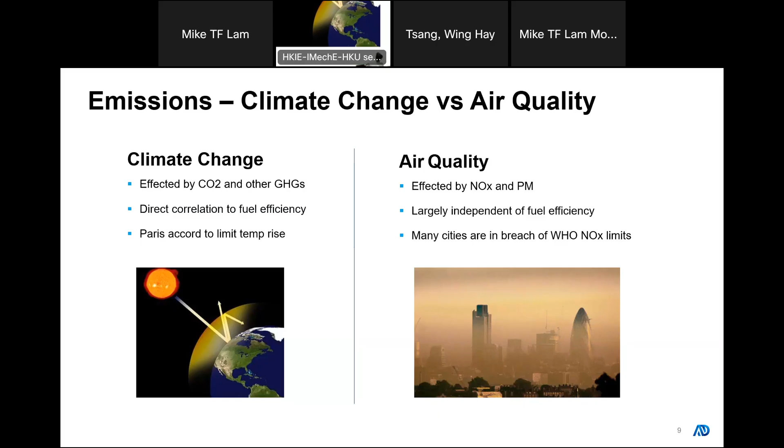So let's just define what a low emission vehicle is. And again, it really depends on how you're looking to improve the vehicle and what aspects you're trying to address. There are a number of different approaches that are used in different places around the world. So let's take London as an example. That has been technology specific. London, about 10, 15 years ago, started mandating hybrid vehicles, or in more recent times, electric vehicles. And they've been doing this for some time. So that's one method that a local authority can influence the vehicles by mandating a technology.

However, probably a more practical route is making it performance specific. So in the UK, the Low Carbon Vehicle Partnership, that's now ZEMO, established performance definitions and testing protocols for low emission buses. So if we would take a bus in the UK, we would take it up to Millbrook, it would go on a standardized test cycle, and we would calculate the amount of CO2 per kilometer. And for that bus to qualify as a low emission bus, it would have to meet a certain formula based on the number of passengers it carries, and then compared with an equivalent, say, Euro 3 vehicle in the original case of the system, or in the case of later vehicles against Euro 5. So that's another method.

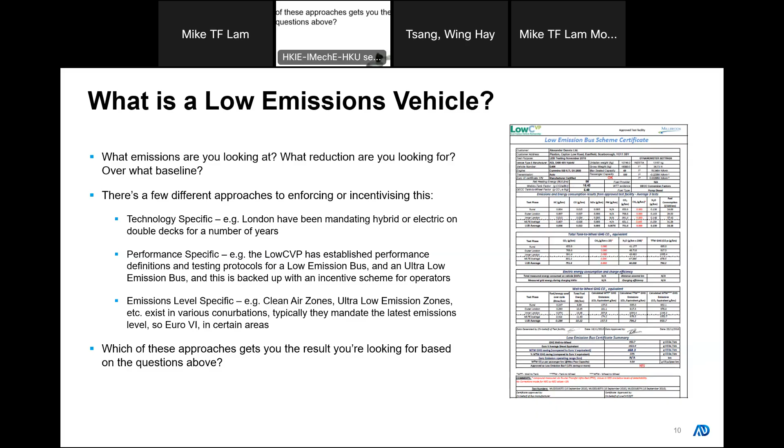And then finally, what we're seeing now, especially in London, you're getting clean air zones. We've got the ultra low emission zone coming in London. And in that case, they're mandating a particular emission standard for vehicles. So in the case of the ultra low emission zones in London and around the UK, that's Euro 6 in certain areas. And depending on what problem you're trying to solve will depend on which of these approaches gets you the very best results.

Let's have a look at the evolution of diesel, because diesel has been around obviously a very long time, and there's been incremental changes as the Euro emissions have evolved since they came in in 1992 with Euro 1. I think this graph on the left there is a really great example of how much better in terms of emission performance the diesel buses of today, Euro 6s for example, are. So if we take 36 Euro 6 buses today, they would generate about the same amount of particulate matter as one pre-Euro bus that they replace. And I think that's a massive testimony to all the engine manufacturers in terms of delivering better emission standards.

I remember as a young boy going to the bus depots in London. When the buses started up in the morning at the run out, you'd have 50, 100 Gardner engine vehicles, and you couldn't see from one end of the depot to the other. And now, there's just no sign of a whiff of smoke, even on startup. I remember, you'd be black.

Just because you've been in the bus depot. And so it is transformational. And in terms of NOx, the same number represents 20.

So let's have a look in Hong Kong. If you look in Hong Kong, where a bus that's being bought today is probably replacing a Euro 3 or a Euro 4. A Euro 3 vehicle, among 12 of those Euro 6 buses will generate the same amount of NOx as just one of the buses it's replacing. And in the case of particulate matter, that's 10. Now, I think that's a point that is missed by the authorities here in terms of the improvement of the general fleet.

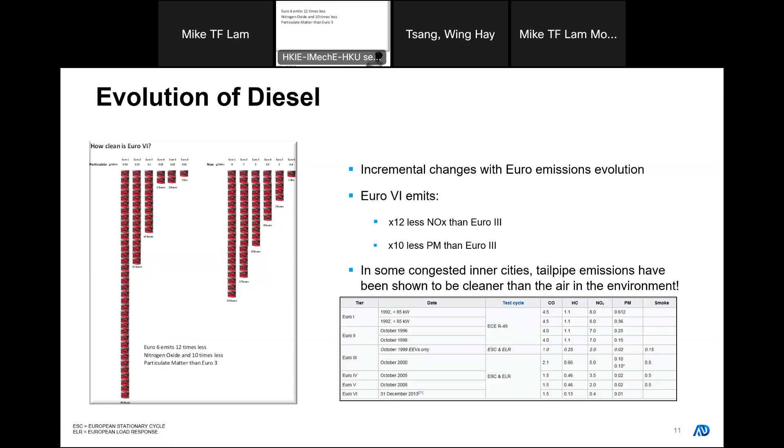So let's have a look at Euro 7. Euro 7 was announced in November last year. The Euro 7 regulations are intended to replace and simplify all the previous emission standards. So whereas at Euro 6 you've got different emission levels for cars and heavy-duty vehicles, at Euro 7 it's intended to harmonise that. And it broadens the range of driving conditions, because in the Euro 6 regulations, the short trips, for example, aren't covered, and they will be at Euro 7.

Also, increased ambient temperature will be taken into account at Euro 7. There's tightened limits for pollutants. I think it's 35% reduction in NOx and 39% in particulate matter. So it's another step change from Euro 6. Also, in terms of tightening the emission for pollutants,

What's happened there? Any advice?

I'll keep going. So, as well as looking at emissions from the vehicles, it's also going to be regulating emissions from tires and brakes. Microplastics coming from the tires is considered a significant pollutant. Thank you very much. And also particulate matter coming from brake systems will now be considered as part of the legislation at Euro 7. Nitrous oxide is added to the pollutant list. And now there's a longer period of compliance required as well.

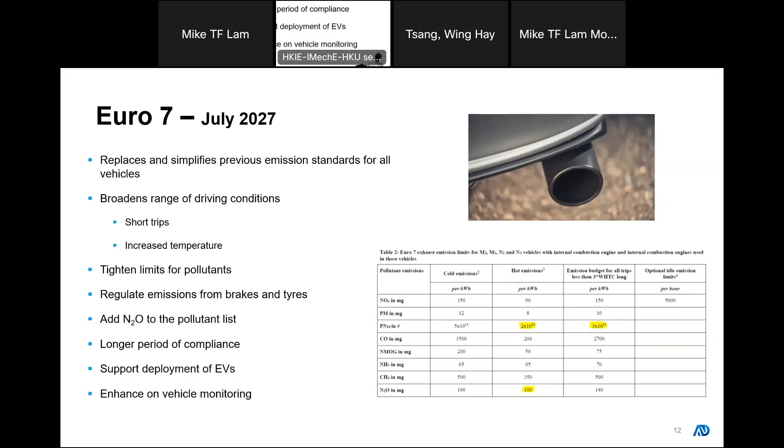So let's have a quick look at emissions and pollutants. But I like this picture. This picture was taken in Scotland, showing one of our Enviro 500s there, and a representation of the number of passengers if they all traveled by car, and the number of passengers that you could get on one bus. And I think this speaks 1,000 words in how bus, just by taking so many vehicles off the streets, is in the first place a good news story in terms of congestion and emission. So we do need to promote as much as possible modal shift out of cars and into public transport.

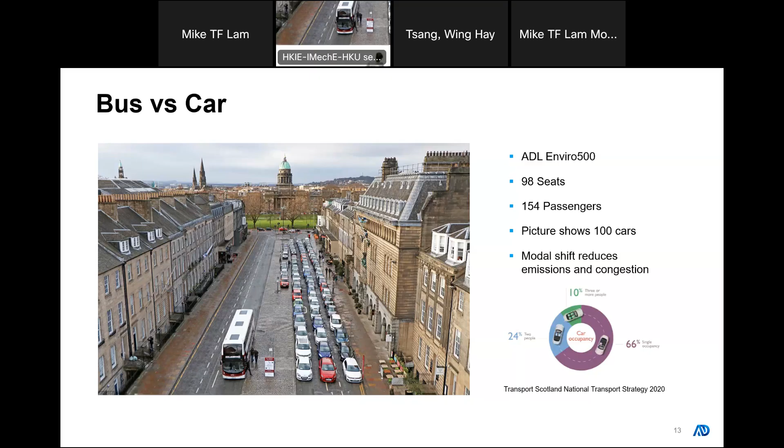Just before we move on to other technologies and in-build, I think it's worth mentioning what we could do with vehicles that are already in service today. So we're currently undertaking a retrofit trial with the EPD here to retrofit an enhanced SCRT system onto Euro 5 buses. The SCRT is a selective catalytic reduction system fitted with a diesel particulate filter as well, a trap. And in that way, we can take about 80% more NOx out of the system, and also over 80% more particulate matter as well.

So it's early days. We fitted the first vehicles at the end of last year, but we've now got all 12 trial vehicles across 3 different vehicle types, across two different bus operators. And just those 12 vehicles have saved over 1,305 kilograms of NOx already. And I think that's quite an interesting stat when you look that we have built nearly 3,000 of these Euro 5 Enviro 500s since 2012. So there's scope there to improve the emission performance of vehicles that are already in service. That's got some exciting possibilities going forward.

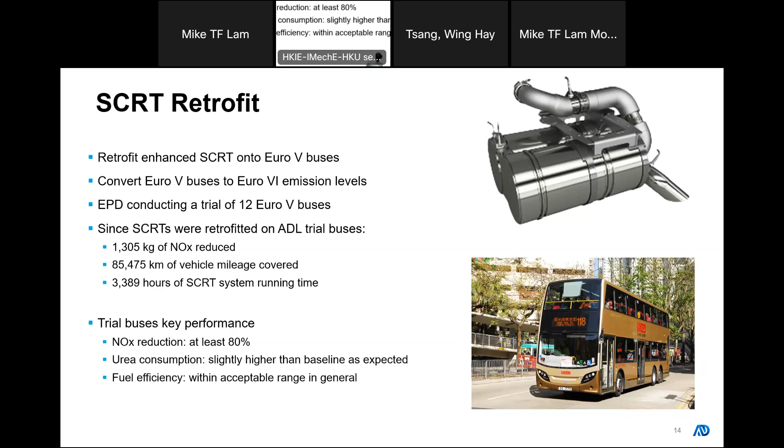It's okay. Right. So that's a little bit of background, and now let's look at new vehicles, what we can do with new vehicles, how we can design and develop new vehicles on that journey towards zero emissions. It's been a long journey. We've been at it for a very long time now, and there's a number of different stops on the way there. So we'll start with base diesel vehicles.

We'll talk about efficient diesel vehicles. We'll look at some hybrid vehicles with mild hybrid systems, full hybrid systems, range extended hybrid systems, and then we'll talk about hydrogen vehicles and then the full electric products. So let's start with the efficient diesel. I've already said that diesels in buses is not a bad solution as it is.

However, what we did discover in the UK is when the Low Carbon Vehicle Partnership put up a challenge to deliver low carbon emitting buses into the UK, we discovered you could do that by hybridization, but also using some clever tricks with the existing diesel vehicle, and we could get down to a bus that complied with the low carbon emitting bus standards.

And that's important because in the UK, low carbon emitting buses at the time were being subsidized by the government to the tune of about 6 pence per kilometre. I think if you do about 80,000 kilometres a year, that equates to about 4,800, 4,600 pounds. So that's a really significant saving, especially if you consider that is going to be for the life of the vehicle. So you've almost paid for half of the vehicle over the course of its life just from this subsidy alone. So there was a big impetus to make the vehicles compliant to this.

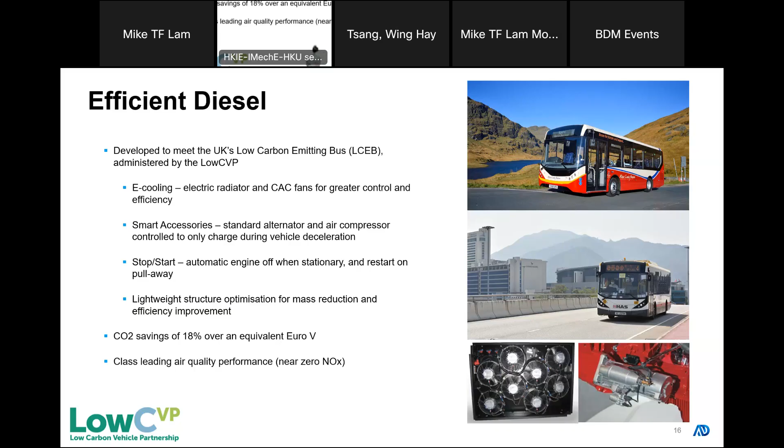And also, in common with all of Alexander Dennis projects, we've made them as light and optimized the structure as best as possible to reduce the mass. In the old days, we used to say about a mile per gallon per ton. If you take a ton out of the bus, you'd save about a mile per gallon. It's not quite as much as that, but it's a good sales point. So we saved about 18% of CO2 over an equivalent Euro 5 by implementing these options.

The reason they used petrol electric was because the drivers were really struggling to cope with driving a bus which has got a clutch pedal, it's got a brake pedal, it's got a throttle pedal, you've got this lever that changes gears, you've got a horrible crash gearbox. They're a nightmare to drive. I've driven them for many years, and they are really quite taxing to drive.

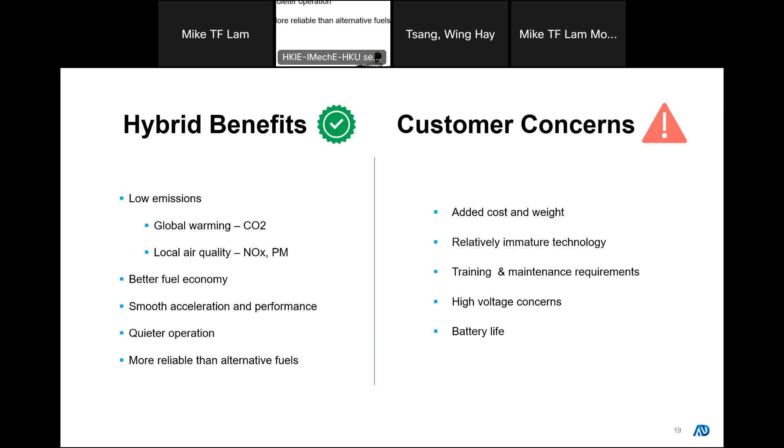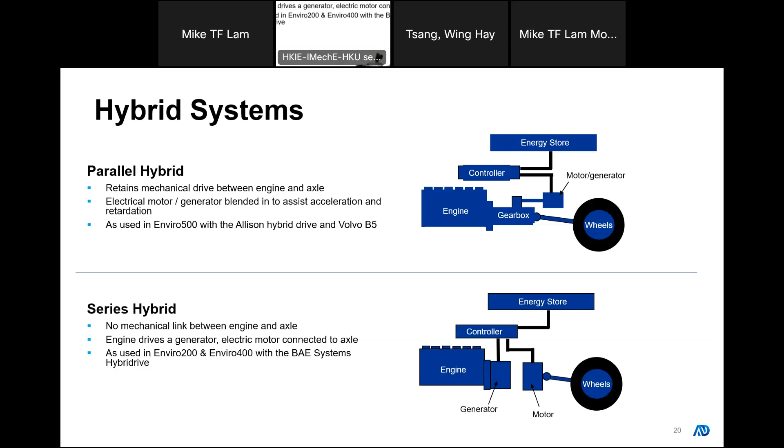As you can see there, there is no physical link between the engine and road wheels. That motor is mounted directly through the differential to the road wheels. So in that respect, I really consider that to be an electric vehicle, but at this stage it's got its own onboard generator, which it needs to be able to operate effectively. So we use the series hybrid system on the Enviro 200 and Enviro 400 in the UK with the BAE Systems hybrid drive. And as I say, we've built about 1,700 of those now in the UK.

So let's have a look at some of the key elements. We'll talk about the prime mover in the next slide, but in terms of the electrical machines, on the back of the engine we've got an integrated starter generator. This is a generator, a permanent magnet machine, that also can be used to start the engine. So in terms of a stop-start variant, we can use that generator to start the engine. And it's amazing when it does. It just clicks in. It's not like a normal start. It just goes. It instantly starts when it's being started from the starter generator.

So we've got that, and then attached to the rear axle is a large permanent magnet electric motor, and they have proved to be remarkably efficient over the life of the vehicles. And then the key part is, of course, the battery, the energy storage system. Now, that energy storage system, in the case of these hybrids, is an 11.6 kilowatt-hour battery pack, which today, as we're looking at EVs with nearly 500 kilowatt-hours of battery, sounds remarkably small. But over 15 years ago, when we first started to introduce those, they were considered to be quite large.

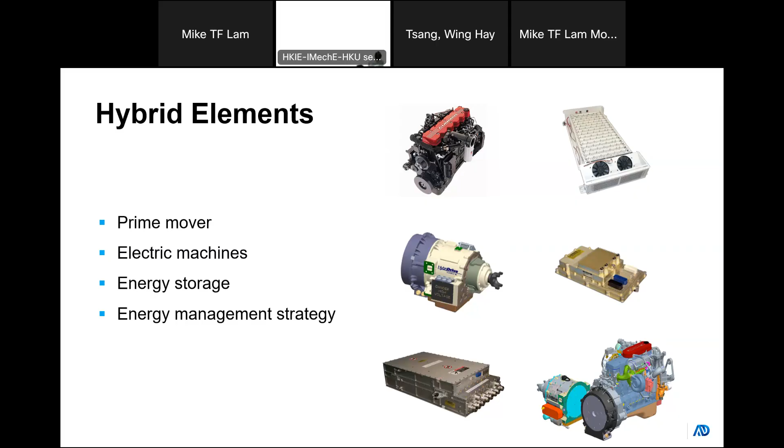So there's a number of different ways of powering your hybrid vehicle, because obviously now you don't necessarily need a big diesel engine. So you've got a few options. Some of you may remember when Park Island over here got a couple of hybrid vehicles in about 2003 or 4. They used a small micro turbine, which is great on emissions.

However, they weren't very efficient in terms of fuel consumption, but they were quiet, low power, and one of the big disadvantages, you couldn't power any of the auxiliaries in the normal way. You have to have an electric compressor, an electric power steering system, an electric cooling system, because all of those can't be operated off the micro turbine.

Now, quite a few hybrid vehicles in the UK also used a sort of car-derived van type engine, say a 2.5 litre Transit type of engine. Now, on paper, it looks great, but what you discover is that those engines end up working incredibly hard in that duty cycle.

And whilst they're great in a Ford Transit, in a double-deck bus operating at almost max torque or power almost continuously, it found that they were not particularly good on fuel, and they needed a significant amount of maintenance. But people in bus depots are not used to changing timing belts, for example. And again, they also had the issue with auxiliary drives.

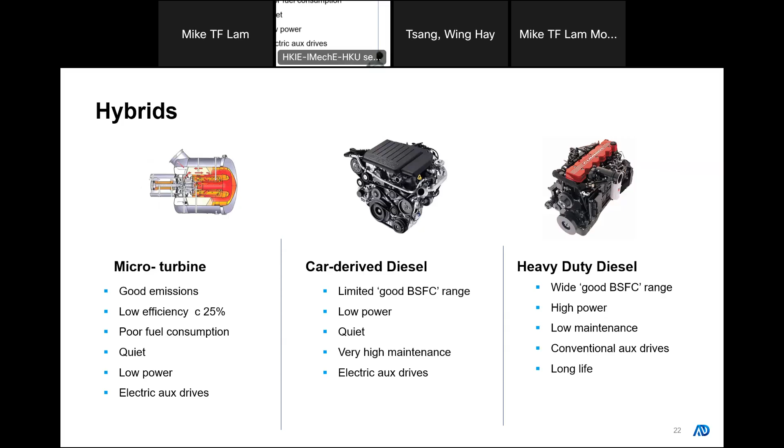And that was the Enviro 350 hybrid. And that was a full-size single-decker. We designed it originally for Europe, but also exported it to places as far as Australia. And it was a really novel way. And it was the first time we were able to split out the driveline like that. So it really gave us an exciting opportunity.

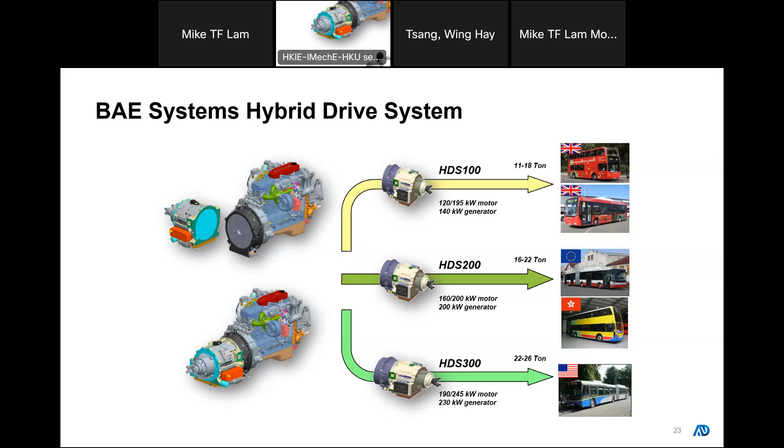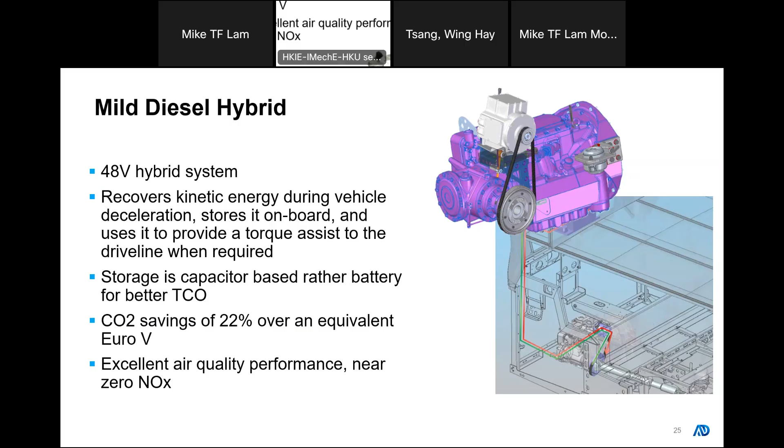And that just recovered enough kinetic energy to meet the regulations of meeting a low carbon emitting bus in the UK. And it still saved about 22% over an equivalent Euro 5. So it delivered excellent air quality performance and again, near zero NOx. That was another diesel hybrid that we used in the UK, and we built about 500 or 600 of those.

Another option that was not necessarily as popular or successful, but I think it's worth mentioning, as not all hybrid solutions have proved to be a success. We teamed up, it must be 2015, with GKN, and they had this Gyrodrive system, which was developed for the Audi Le Mans winning R18 car around that time.

So this is a kinetic energy recovery system, but this time they've got, into the drive line there, that motor generator. The motor generates electricity. The electricity is used to power up a flywheel, and that flywheel that spins up to 36,000 RPM is able to store kinetic energy, which can then be released when the vehicle pulls away again. So it's just another version of a hybrid drive that we have tried and fitted in the UK.

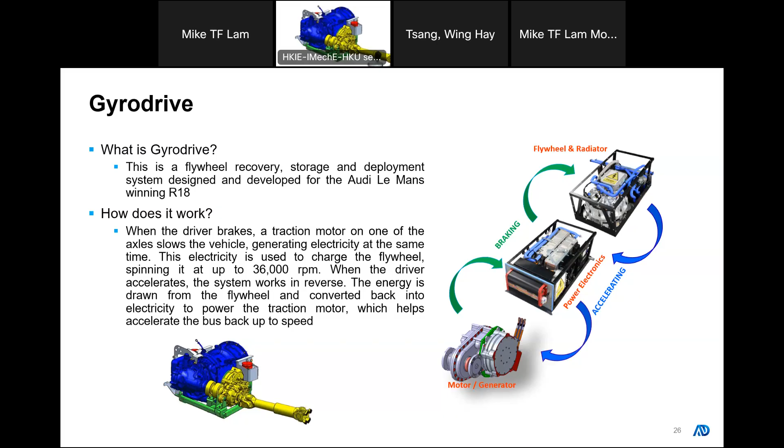However, I will say that none of them lasted that long. What was noticeable is how noisy they were, because the power electronics there and the flywheel itself was sat inside the saloon, and they really were quite noisy, because probably the biggest noise was the vacuum pump necessary to evacuate the flywheel, because that needs to spin in a vacuum. So it was an interesting exercise. Certainly a fair few vehicles were sold with it, but none certainly remain today. But it was an interesting technical exercise.

So again, working with BAE Systems, they had an ultra capacitor version of their hybrid drive. I mentioned earlier that one of the challenges of the hybrid was having a battery that had a life of about 5 years, whereas an ultra capacitor has got a much bigger life, and therefore BAE used that, and again made even better savings, because you could really only use the battery within about plus minus 10% of its midpoint, which didn't give you a huge amount of energy you could recover and put back into the system. However, with the ultra capacitor, we were able to capture more energy and then put it back more without having to overstress the battery so much.

And this vehicle, because it is a relatively low energy storage system, wasn't able to have any EV capability. But this was the first vehicle in the UK to achieve the ultra low emitting bus certification standard.

So the next one in the series was what was called the electric range hybrid, or the extended range hybrid by some. So this is similar architecture to the first vehicles I've already mentioned, but this time the battery pack has increased in size to 32 kilowatt hours. Now, for me, this is a really interesting point, because that 32 kilowatt hour battery fits in virtually the same envelope as the original 11.6 kilowatt hour battery.

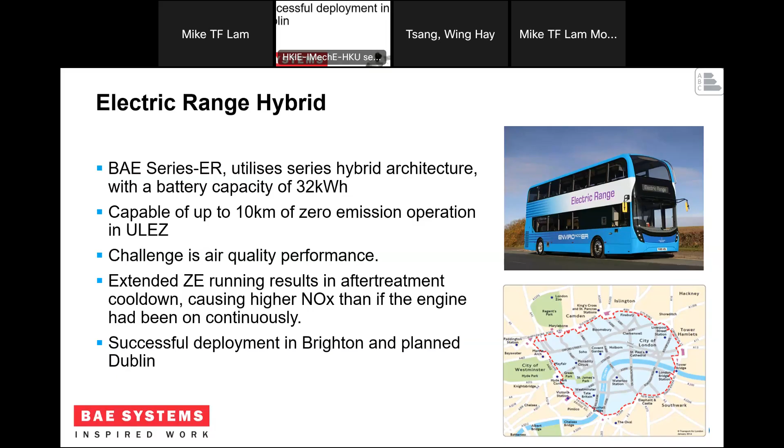Also, as a town planner, it means that you can switch the engine off in designated zones, have a particular low emission zone, switch the engine off if you want to go through, or, in the case of Australia, for example, if you want to go through a bus tunnel, you can just switch the engine off and keep going without having to invest in all the infrastructure you need for a full electric vehicle. So this is yet another really nice little halfway house.

So I think this is the last one when it comes to hybrids. This is what we call our virtual electric, which really takes the ER to the next stage, in that this one has opportunity recharge capability. So it's a larger battery pack, 60 kilowatt hours rather than the 11 or the 32 that I've mentioned on previous slides. But it's also got an inductive charging system. We did this about 2014-ish, 2015-ish, from memory. So it's quite an early adopter of this technology, certainly in the UK.

You can see the bottom picture there shows an underside view of the chassis. You can just about make out those two round coils. It was GPS based, so we could switch the engine off at certain parts of the drive. Again, it's got a full suite of auxiliaries, so it really is a true electric bus. But it's also got that engine and generator to allow it to have almost infinite range. We did find it turned out to be a fairly complex system to put into service. There are vehicles running in Glasgow, and they ran on Route 69 in London.

This was actually an interesting exercise, and one of the challenges about opportunity recharge is that trying to get permission to sink coils in the road proved, especially in London, to be really difficult. That's why Route 69 was chosen, because Transport for London owned the site at both ends of the route, and were eventually able to get permission, even on their own sites, to install the infrastructure that was necessary to charge the vehicles. It was a bit complicated.

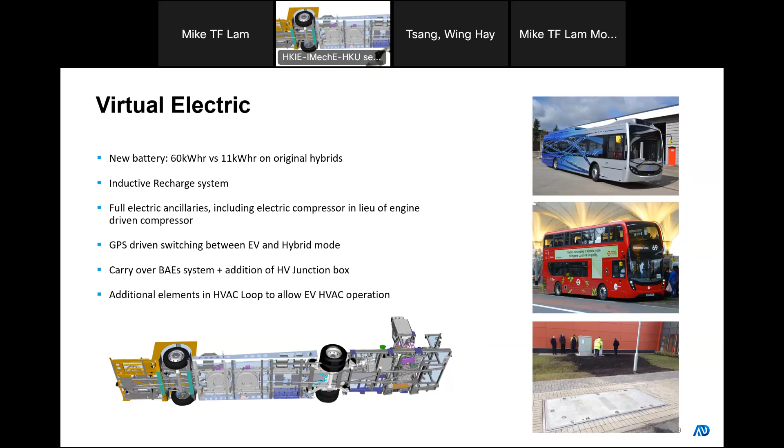Right, now that is the end of hybrids, and now we're on to our zero-emission vehicles. He says, just checking the time.

Good. So, zero emissions, obviously the panacea of all politicians. It's what we all want. However, there are some significant challenges. It's easy to build an electric bus. Anybody can do it. We can all do it. However, building an electric bus that meets the requirements of the passengers and the operators is actually really quite difficult. Our job as a manufacturer is to have the right products, the right total cost of ownership performance, and the right emissions performance at the right price point. And we've got to get all of that right. Otherwise, customers don't want the vehicles.

I know we were talking about this earlier. It's easy in somewhere like the UK, where there's significant subsidy for vehicles, for the government to promote clean energy vehicles. Here in Hong Kong, the operators live and die by the fare box.

So it is really difficult to incentivize them to move towards full electric vehicles when a passenger isn't going to pay more to get on an electric vehicle or a zero emission vehicle when he can get on a diesel vehicle, which has a significantly lower cost of ownership, certainly at this stage of their life cycle. So we also really do need to take into account the passenger's perspective, and it is down to us to make the vehicle as comfortable and as accommodating as possible. So we'll see, hopefully, how we try to do that on our own electric vehicles.

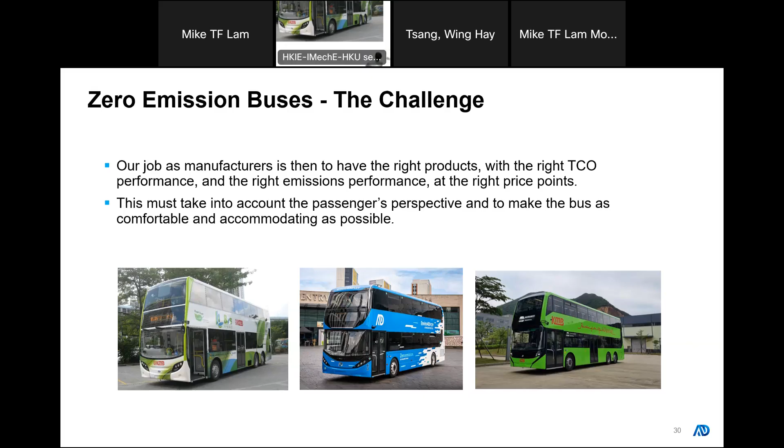There is more to it than just looking at the curbside emissions, because we talk about zero emissions. It isn't really zero emission, it is zero curbside emissions. We do, as engineers, have to look at well-to-wheel performance of vehicles. Here in Hong Kong, I was looking it up earlier, our electricity still comes significantly from fossil fuels. I think between 550 grams per kilowatt hour and 710 grams per kilowatt hour of CO2 is emitted through electricity generation. So it is important to consider that.

And also, where do you get your hydrogen from? You've got green hydrogen, brown hydrogen, blue hydrogen. It's almost all the colors of the rainbow, but this really only works if you are getting green hydrogen. Our customers in the UK are struggling to find green hydrogen at the moment without paying about £140 per kilogram. That's an awful lot of money. If you think a UK bus has got 28 kilograms of hydrogen, £140 each, it's a lot of money, especially if you're comparing it with a more traditional driveline. There needs to be some significant incentives to be able to follow that up.

Also, we really shouldn't forget that batteries don't suddenly appear out of free space. They take a lot of energy and a lot of valuable resources to create. And we do need to consider end of life and what we do with those batteries. There's a number of endeavors now. Second life vehicle batteries are reused in power generation, for example, for capture and storage of wind power. The first life on the vehicle is quite a nasty duty cycle for the battery. However, second life in a less arduous duty cycle is entirely possible.

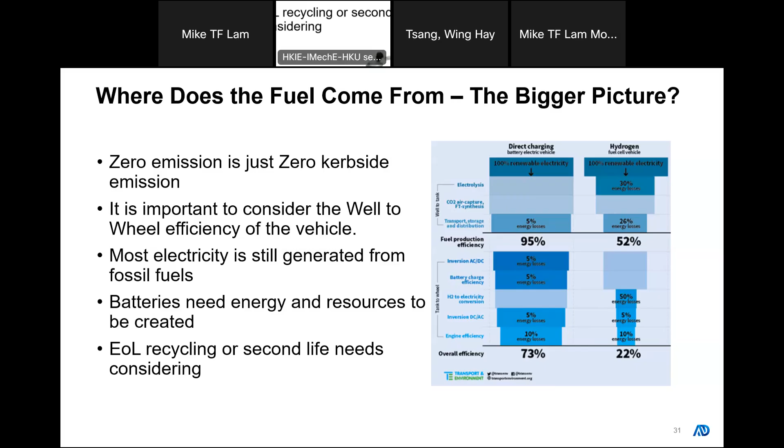So if you look on the right-hand side there, in terms of round trip efficiency from having electricity in the first place to getting some kinetic energy on the vehicle, with a direct charged EV, we are at about 73%. However, with hydrogen, because you've got to create it, store it, liquefy it, transport it, compress it, and put it onto the vehicle, there are some significant challenges if we're looking at it on a pure energy basis. So I think it is important that we look at the bigger picture.

Oops, I've skipped a couple there.

So let's have a look at the hydrogen buses now. There we've got the image of our original vehicle in the UK. So a hydrogen fuel cell vehicle, why hydrogen? Having said what I just said, it does answer some of the questions we see today with battery electric vehicles around range. Range anxiety is real. It's real here, it's real in the UK. Batteries are getting better, but at this stage we can get about 300 miles with a hydrogen vehicle in the UK, which is significantly more than a battery electric vehicle.

Especially when you consider things like HVAC, so heating and cooling. We'll talk more about that later, because hotel loads on zero-emission vehicles is an absolutely critical topic for discussion. Also, hydrogen does win in terms of charge and refuel time. You can fill your hydrogen vehicle in 5 to 15 minutes.

However, there is a weight penalty. You can see on the image on the right there some of the hydrogen fuel tanks we fitted on our prototype. Now they are quite heavy, probably not quite as heavy as batteries on an EV, but because we have to store those hydrogen fuel tanks, we do lose a little bit of capacity. And also that shows the challenge over here in Hong Kong with a hydrogen vehicle, where those tanks are currently sitting exactly where we would normally fit the air conditioning system. So we've got a space claim challenge here in Hong Kong.

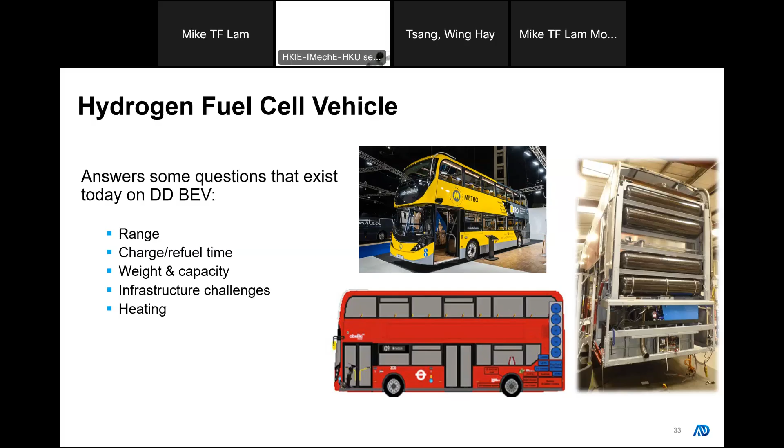So in the UK, heating is much more important than air conditioning, and we are able to scavenge heat off of the fuel cell to be able to help heat the vehicle, which is good. We'll have a quick look at some of the systems that we're fitting in the hydrogen fuel cell vehicle. So we use the Ballard fuel cell, as I think most people are. They were synonymous really with fuel cells for a very long time. We're using the FCmove HD 45 kilowatts, the NPROXX hydrogen tanks, 28 kilograms of hydrogen.

Storing hydrogen on board the vehicle is a challenge. We all know that hydrogen is the smallest element. It has great searching properties. If it can find a way out, it will. The density of hydrogen is about 90 grams per cubic meter, if I remember rightly. It's a very, very light gas, which does mean that if it does leak, it does escape vertically upwards quite quickly, which is a plus point.

So in terms of the electric drive itself on the fuel cell electric vehicle, we use the Voith VEDS heavy duty system. And what we try and do across all of our designs is to try and maximize commonality as much as possible. So whether it's the fuel cell EV or the battery electric vehicle, we are using the Voith electric drive system. We're using ZF axles throughout, and that gives us commonality with traditional diesel vehicles. We're using a 30 kilowatt hour battery using LTO technology, lithium titanate. Because this is a hybrid, what we need is a high power battery, and the lithium titanate chemistry is really good at delivering that. And that'll be a fit and forget. We don't have to change that battery within the life of the vehicle.

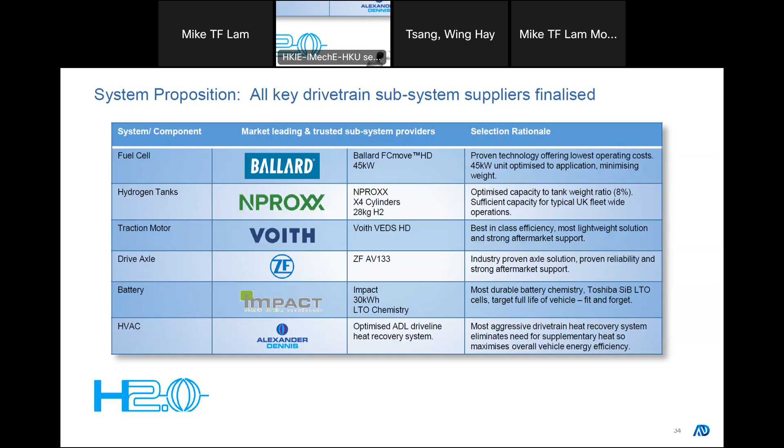And I've already mentioned HVAC is critical on all of these zero emission vehicles. It was the HVAC that killed the hybrid in Hong Kong. It's because we fitted the electric driveline. The electric air conditioning system used so much power. We demonstrated that about 40% of the power is just being used to keep the bus cool, and that is obviously a challenge here as well with our EVs, especially here in the tropics, where we have such high hotel loads. It's an exciting challenge. But as I said, in the UK, we need heat, not cool.

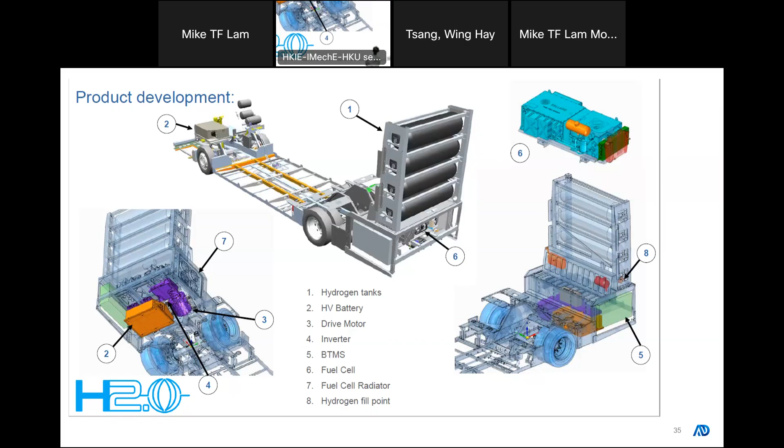So just got an image here of our design, because again, what I hope you can see here is we've tried to optimize the saloon space for our passengers. No steps, flat floor throughout, seats all the way to the back of the vehicle, and that's most important for us. It's all about delivering a product that passengers can get on with confidence. And I won't go through this in detail, but you can see we put the fuel cell at the back. We've got the hydrogen fuel tanks up the back on this. And obviously the cooling packs and the rest of the equipment is mainly in what used to be the engine bay. And the Voith driveline is sitting pretty much where the old Voith gearbox used to be.

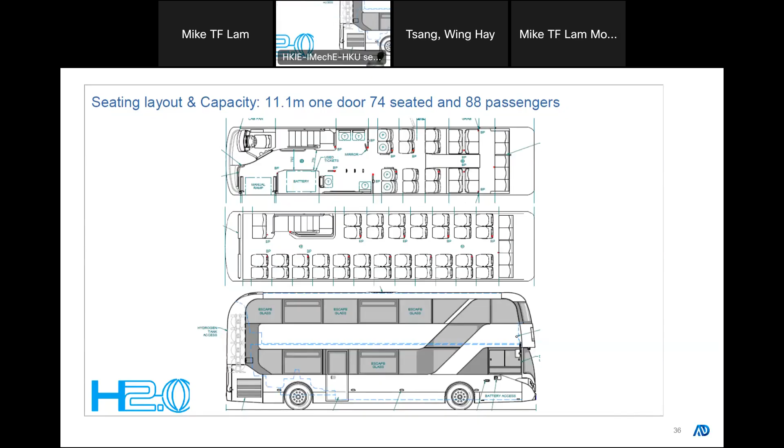And that's just a layout that shows how it works in the UK. The 11.1 meter vehicle has got 74 seated passengers. The bus is plated though, so this is another example of where UK or European legislation differs from Hong Kong, because we're allowed in the UK to get 19.5 tons on 2 axles, whereas here we're only allowed 18 tons, and even that's through exemption.

Right, so that's just a quick look at our hydrogen vehicles. We'll look now at our battery electric vehicles that we're building now and developed in the UK. So first of all, we'll start with the UK products, where we teamed up with BYD, Build Your Dreams. We all know them over in Shenzhen. We've seen their vehicles here.

So ADL teamed up with them in 2015 to offer our bodies on the BYD chassis, and that has proven to be a really good partnership. As I say, we've built over 2,000 of these vehicles now, and over 70% of the UK electric bus market are these vehicles. It's taught us a huge amount about how electric vehicles run and some of the challenges that we see in real life. I've already mentioned HVAC, and I'm going to do it again because it is absolutely critical on the EV vehicles.

We've seen, especially this year, with temperatures in Scotland getting down to about -10, the challenges of operating electric vehicles in those climates is proving to use a significant amount of electricity just to try and keep the vehicles warm, whereas here we have the complete opposite in trying to keep them cool. However, most of the year we can get about 160 miles out of those. What's that? 260 kilometers. So we get a pretty reasonable range in the UK, bearing in mind there's not so much hotel loads as we exhibit here in the tropics.

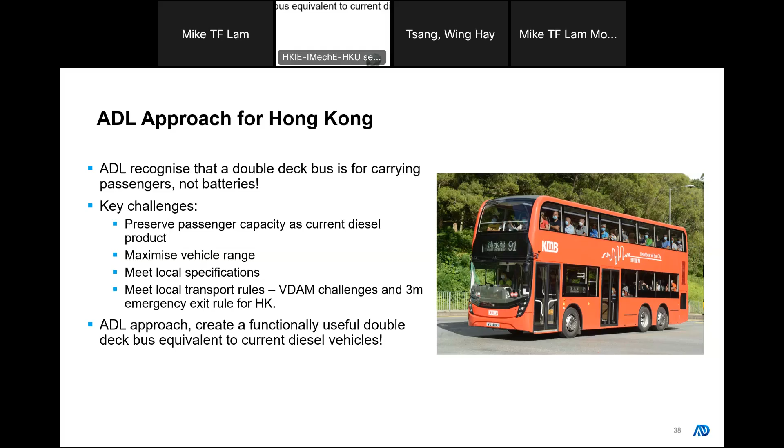And we've maximized the vehicle range by fitting as many batteries as we humanly possibly can fit in there. There is 472 kilowatt hours of batteries on board that vehicle. Not that one, but the electric version. So it is all about creating a functionally useful double deck bus equivalent as possible to the current diesel vehicles so that they fit into the fleet seamlessly.

Battery electric bus operation, it is all about energy management. It's a different way of considering purchasing buses now. You no longer just go and buy a vehicle, put 350 liters of fuel in it and then take it off and away you go. Can't do that anymore. You've really got to think about where you're going to operate that route.

472 kilowatt hours of battery sounds an awful lot, but in worst case scenario, with maximum loads on the air conditioning, a full load of passengers, perhaps not the best driver in the world, we can get almost to 3+ kilowatt hours per kilometer, and that is a staggering amount of energy. However, we have to work really carefully to try and minimize that as best as possible. The range is all going to be dependent on seasonality, load on the vehicle, the topography, driver behavior.

I mean, we drove the first vehicle over here on Thursday. It traveled nearly 300 kilometers and still had about 45% of the battery left. So it all depends on how you use the bus, and you just got to think about that a little bit more when it comes to pure electric vehicles.

So we've selected on our vehicles the NMC battery chemistry. I'll come on to battery chemistry in a minute, but we've used that mainly because it delivers the best possible energy density on the vehicle. And it also allows us to optimize the packaging. We've managed to shrink wrap that vehicle around batteries, whether they're under the floor, under the stairs, over the nearside front wheel arch, or in the old engine bay.

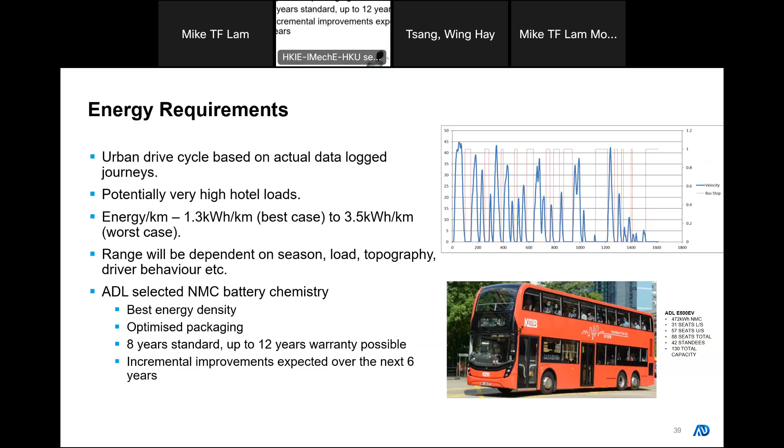So because we only have a limited amount of energy on board, we do have to consider where we're going to operate that bus. So what we do is we data log existing buses in service. We monitor what that bus is doing second by second throughout the day of operation, whether the vehicle is accelerating, how fast it's accelerating, how much energy it's going to use to keep the vehicle cool, how much energy is going into the brakes, how much could be recovered through regenerative braking. And then we map that out over the course of a couple of weeks, integrate that over the time, and work out whether an electric vehicle would operate suitably on that particular route and advise accordingly.

So bus operators, for example, are used to setting the air conditioning here at 22.5 degrees and having the passengers shiver on the top deck of the vehicle as they go to work. This is an opportunity to change that mold. Just setting the temperature up by a couple of degrees will increase the range of the vehicle significantly. Now's an opportunity to start looking at that as a wider issue in terms of vehicle operation. But actually doing this energy analysis and understanding how the buses will use energy is absolutely critical to deliver something to the customers that they can use practically in service.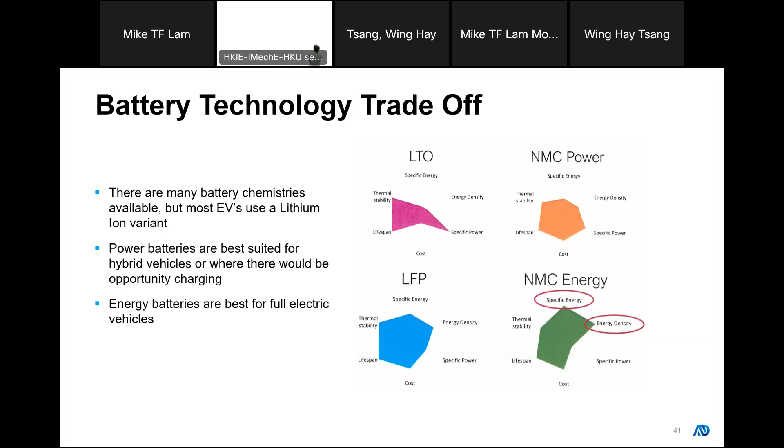So what have we done with these batteries? I mentioned earlier we have pretty much shrink-wrapped those around the vehicle. We've got 5 battery packs under the floor, 3 underneath the staircase and over the wheel arch, and 6 more in the back end. There are 4 strings: 2 in the back, 1 at the front, and 1 under the floor. Each of those strings has got 118 kilowatt hours, and together that comes up to 472 kilowatt hours of gross capacity. 472 kilowatt hours. This is an electric bus. That's a headline number. You can't use 472 kilowatt hours, and you never will.

At the absolute best, you'll be able to use 90%. You don't run the thing to 0 and then fill it up to 100. That would just destroy the battery in a relatively short space of time. It's all about battery management, getting the most out of that battery asset. So in terms of our range calculations, we usually use about 80%. And because we know the bus is going to be operated for about 10 years with that set of batteries, after those 10 years the batteries will degrade by a certain amount.

If we say it's 80%, then at the beginning of life we say that vehicle will have a range of 80% of 80%. So it won't be 472 kilowatt hours. We do our beginning of life calculation based on about 330 kilowatt hours. That way we know that in 10 years' time, that bus is still going to have the same range that we promise on day one, even though we know on day one it will theoretically have a significantly higher range. That's an important point. Headline figures on day one are so easy to quote, but we've got to think about the full life of that battery pack, not just day one. And I think that is critical.

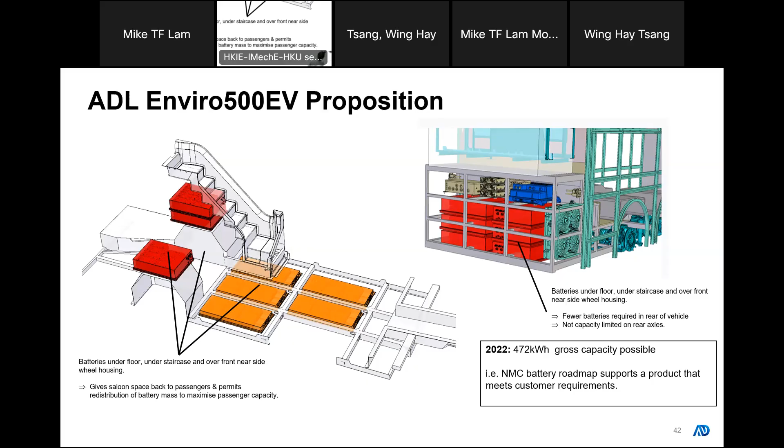So this is what we've achieved on the Enviro 500 EV for Hong Kong. If you looked at that, you would not see the difference between it and a standard diesel vehicle. When I showed it off for the first time on Saturday, as I say, at KMB's 90th anniversary celebrations, if you step on it as a passenger, you pretty much wouldn't know that was an electric bus, because all the batteries are hidden outside of the passenger compartment.

There's no reduction of seats in that vehicle. There are 82 seats, and the only reason there's less than a standard diesel vehicle is because there are 2 wheelchair spaces, and KMB took the conscious decision to spread the seats out upstairs to deliver a better passenger experience for their customers. So in theory, we can still get 90 passengers on that vehicle, which is a staggering number of passengers.

We'll find out when it is formally weighed by the Transport Department, but we're expecting about 125 passengers overall. That's another 30 to 40 standees, depending on the layout in the lower saloon. So we are really pleased and proud about how we've managed to shrink wrap that vehicle around that battery pack.

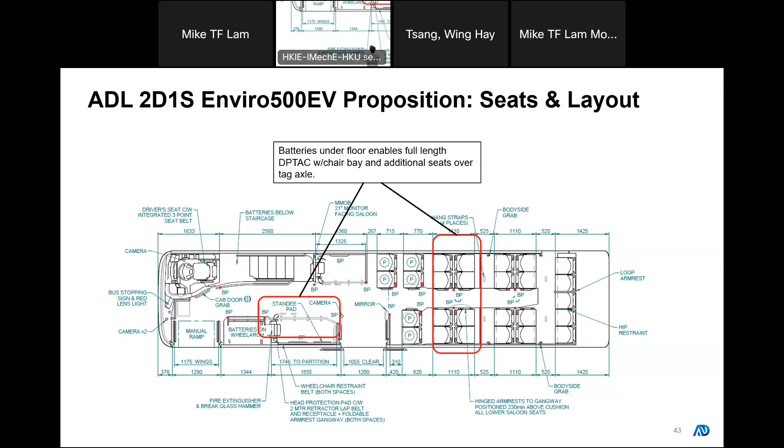And again, the key systems that are on that bus are as common as possible with the rest of the product range. That delivers efficiency for the operators, because the operators' mechanics are familiar with many of the systems, they're familiar with the axles, all those axles are the same. That's one of the reasons we decided to go with the Voith VEDS driveline system. It wasn't just because it is one of the most efficient drive motors on the market.

It was because we could use the same AV132 drive axle as a standard diesel vehicle, which everybody is familiar with, and they potentially would have difficulty in looking after hub motors, for example. So we decided to go with the traction motor option, and that's the same traction motor we use on the hydrogen vehicles as well as the rest of our zero-emission vehicle range.

We've used the NMC battery, as I say. It's got a specific energy of greater than 185 watt-hours per kilogram, and that's today. That's only going to improve. We're expecting to see the next step change in battery energy density in the next 3 years, and then come 2028, as potentially solid-state batteries become more commercially available, I think we'll start seeing some significantly improved energy density, such that maybe the hydrogen versus battery electric vehicle debate is not quite so pronounced as it is today.

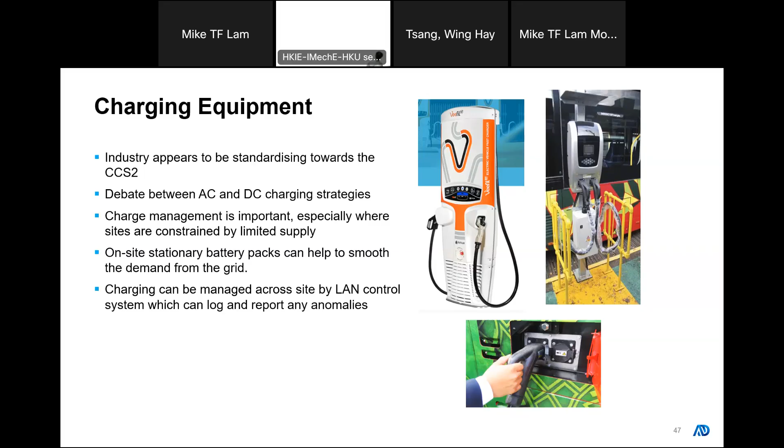residential area, and electrifying the fleet has actually delivered a number of opportunities for the operator, because previously they couldn't operate out of there at the weekends, but now there's no noise because the vehicles are all electric. They can now use those vehicles at other times as well, whereas previously they were prohibited to do so.

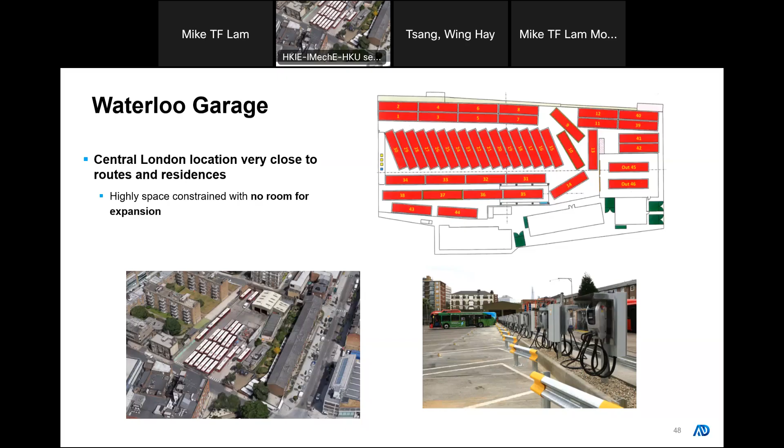I think the challenge you can see there in the top right is the layout, because there were 46 buses in that picture, and 43 of them can be charged at any one time overnight. And that's one of the big differences in terms of the electric vehicles. You do have to think a bit more about your depot layout and how you're able to charge those vehicles.

So we're pretty much coming up to time. So I am going to just summarize really that, I mean, I've mentioned both our hydrogen vehicles and our electric vehicles. It isn't going to be one or the other. It may well be both. At the moment, the hydrogen vehicles win in terms of the greater daily range.

Although, doing some research over here in Hong Kong, if you look at the number of daily routes that can operate at under 200 kilometers, there's probably about 1,000 of the buses that already operate under 200 kilometers a day. So the key to this is putting EVs into service on those routes first.

Nobody in their right mind is going to put an electric vehicle on, say, one of the Airbus routes out to the airport. They do 600 odd kilometers every day, and they almost run out of diesel doing that, 350 liters of diesel. That's the equivalent of over 1,000 kilowatt hours of electricity if we convert it. So you're not going to do it there, but you're going to pick your battles at first and select optimum routes to be able to demonstrate the vehicles first.

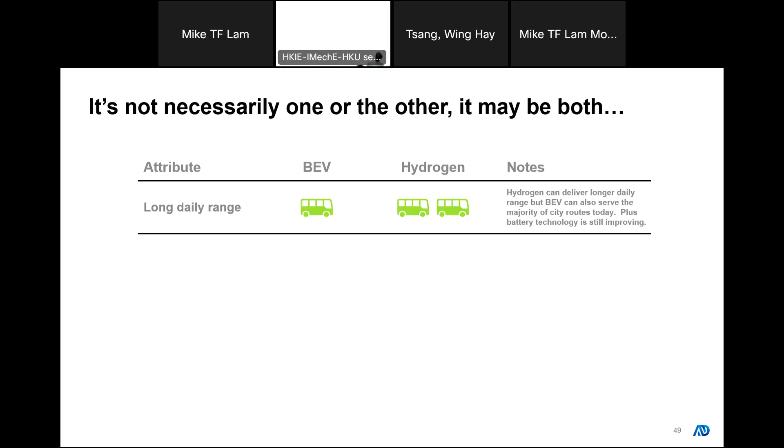And I think that's a really exciting opportunity we've got to work with the operators and the government here as well. So in terms of higher passenger capacity, I've already mentioned the mass of the vehicles, batteries. So here in Hong Kong, you can potentially have more standees on a hydrogen vehicle. But I guess we'll wait and see until the first one's certified here. But hydrogen storage takes less physical space in theory. However, we've managed to capture as much space as possible on our EV, so we don't lose any passengers over diesel.

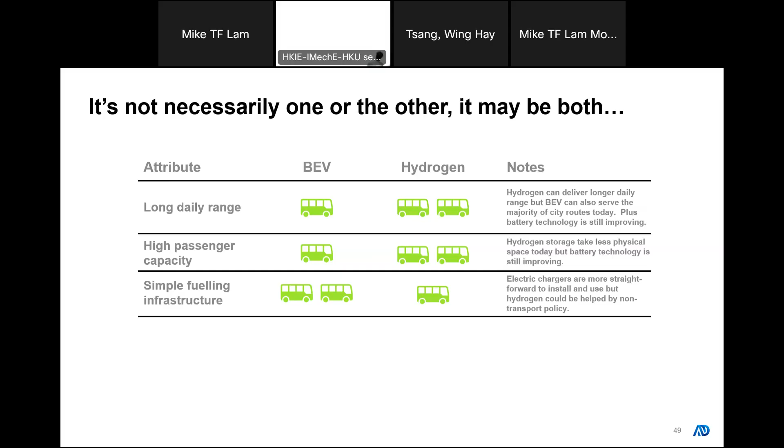In terms of the simple fueling infrastructure, we could argue that the battery electric vehicles are easier to charge rather than set up a hydrogen fuel filling station. We've seen in the UK there's been significant difficulties some of our customers are having obtaining hydrogen and running hydrogen vehicles, to the extent that we are seeing a move at the moment away from hydrogen and more to battery electric vehicles. People who have tried hydrogen now consider it to be an interesting experiment and are moving back to EVs now.

And in terms of total cost of ownership, we do believe that the battery electric vehicle is lower because of the costs of hydrogen. Hydrogen is really expensive at the moment. Also higher maintenance costs. The fuel cells, they're not fit and forget. The membrane within will need some degree of maintenance every 2 to 3 years, depending on the system and the cleanliness of the hydrogen that you're using. And all of this, though, can improve with volume.

I think we are on the cusp of a really exciting journey in terms of vehicle transitions, especially here in Hong Kong, where we have, I think, one of the very best public transport bus networks in the world. You've got about 4 million passenger journeys here in Hong Kong, and if we can translate some of those into electric, whether it's fuel cell or battery electric vehicles, that'll be transformational for not only the customers, the operators, but also Hong Kong itself.

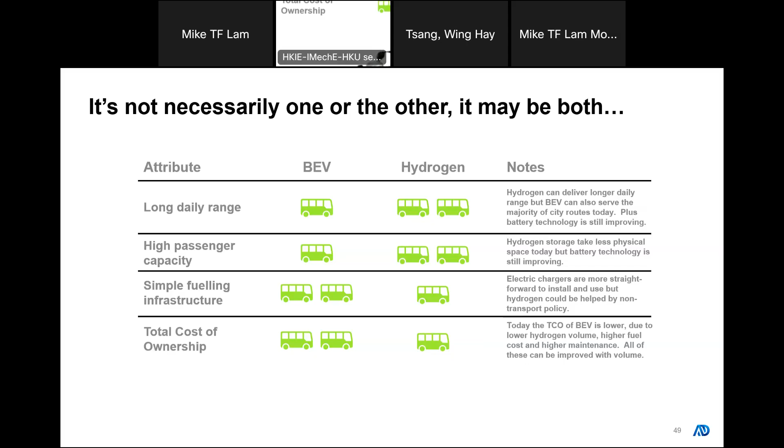And I just think it demonstrates one of the challenges we have here in electrifying the fleet, turning the fleet from diesel, which you can fill in 60 to 90 seconds, 2 rows, say 16 buses at a time, 90 seconds. You can run 1,000 buses in overnight just going through the fueling bay, and translating that into plugging that lot in either to a hydrogen filling station for a significant number of minutes, or into a battery charging point.